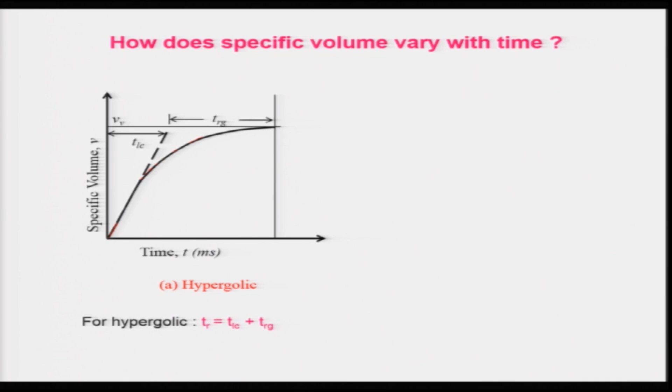And this total time, if you look at it, we can really look at as the residence time. It consists of two times. One is the liquid combustion time, which is required for the liquid phase reaction to occur, that is TLC, the liquid phase time, and the other one is the gas phase time, that is TRG, during which the gas phase reaction will be taking place. So, it is not that easy to demarcate that.

Generally what people do is draw a slope to this initial portion of the reactions, or the initial increase of specific volume, and when it joins this curve, they call this TLC, and the rest is basically the residence time for the gas phase reaction. So, the total residence time consists of two terms in case of hypergolic propellant. One is TLC and the other one is TRG, and you can conduct experiments and find that out.

So, let us look at what happens to the specific volume whenever the liquid fuel is injected into the combustion chamber, particularly for non-hypergolic propellant. In case of non-hypergolic propellant, when it is injected at A, the specific volume will remain almost constant till point B, and later on due to vaporization, atomization, and liquid fragmentation, disintegration of the bulk liquid, there will be vaporization. So, there is a little increase of the specific volume.

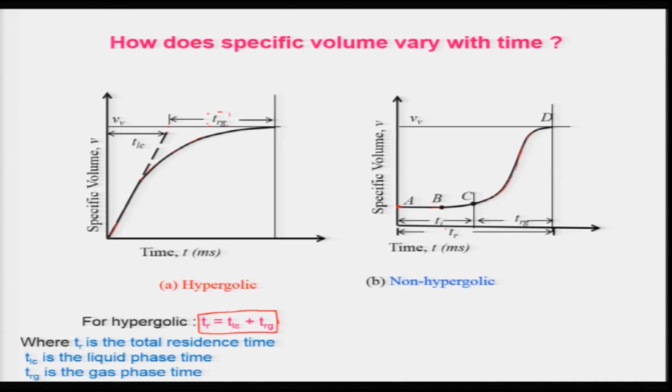So, in a similar manner we can define the total residence time TR as the sum of TI, the ignition delay time, and TRG, the residence time for the gas phase reaction. This total time must be provided such that complete combustion can take place for a particular length of the combustor.

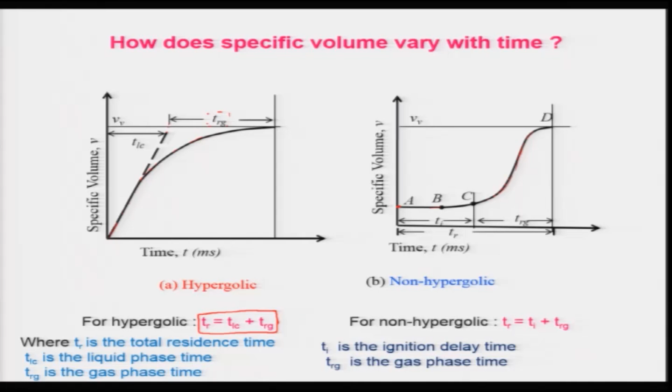And this is required for the design, and as I told, the process is so complex that you cannot really simulate it numerically with the best model available at this moment, even with the best computer. However, one can do a little modeling and look at it, but when you are designing, it is not really that easy. So, you will have to rely on these semi-phenomenological models that can help you.

So, let us look at how we can use this residence time for deciding the combustion chamber geometry. Combustion chamber geometry means, if we consider a cylindrical combustion chamber, a length and a diameter; in other words we will be looking at the volume of the combustion chamber. It is very important because a certain length must be provided in the combustion chamber for a particular velocity, such that the residence time will be good enough for completing the combustion.

So, in order to ensure complete combustion, we need to provide the minimum volume of the combustion chamber in a liquid propellant rocket engine, such that the liquid propellant has enough residence time inside the thrust chamber, so that we can have complete combustion and get a higher thrust utilizing all the energy embedded in the propellant. Therefore, this is very important. And let us look at a rocket engine.

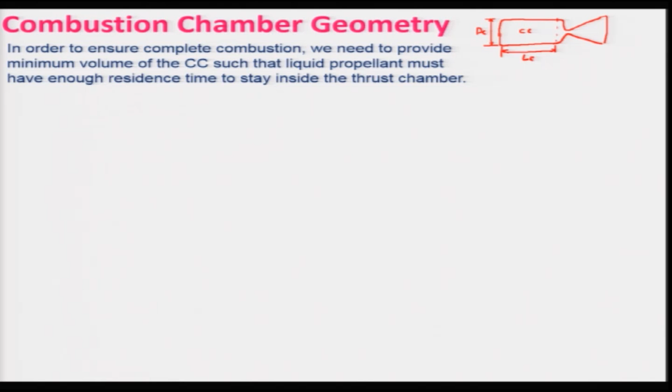If you look at a diagram of that, this portion is your combustion chamber, and it has a length Lc, and this is your diameter, I can say dc. So, from that I can get the area Ac. Ac is your cross-sectional area of the combustion chamber, and Lc is your length of the combustion chamber, and Vc is the volume of the combustion chamber.

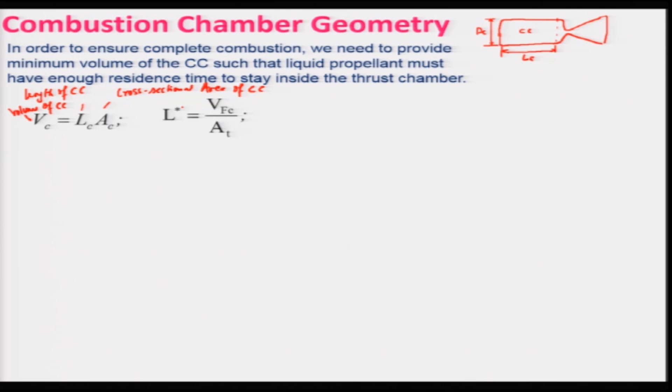So, we will be interested to have a minimum volume, such that it will be a compact one, and at the same time complete combustion must be ensured. So, for that we will have to look at what the residence time will be. Generally people use the characteristic length of a combustor or rocket engine, which is the ratio of Vfc divided by At. At is your throat area.

And Vfc is the sum of Vc, that means this volume, and from here till this, which I can call the convergent portion of the nozzle, V nozzle NC. Because in earlier days people were considering that combustion might be taking place till the end of that, that volume has to be considered in defining the characteristic length.

The characteristic length can also be related to the characteristic velocity. So, we can define a non-dimensional parameter, L star divided by C star. C star is your characteristic velocity. As we already have learned, C star represents how good the combustion is in a liquid propellant rocket engine. We had also defined the combustion efficiency using the characteristic velocity, which is a function of Ti, the ignition delay, for non-hypergolic propellant, and for hypergolic propellant, TLC, the time required for liquid phase combustion.

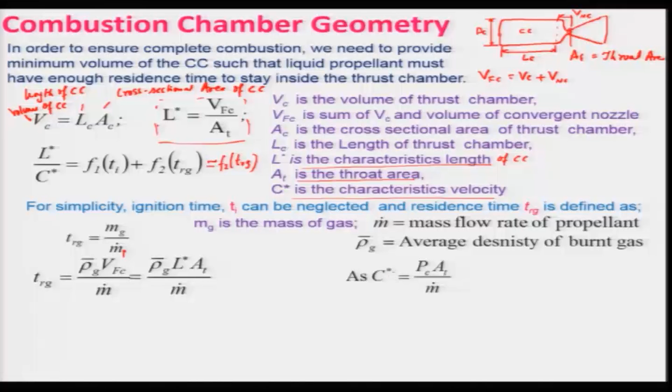If you relate m dot to C star, C star is nothing but Pc At over m dot. So, in place of m dot I can write Pc At over C star. At will cancel out, and I will get rho G L star C star over Pc. I would like to get an expression for L star over C star, so I will multiply C star in the denominator and numerator, so that it becomes squared, and then L star by C star becomes Pc divided by rho G C star squared into TRG.

And we know that the L star by C star is nothing but your function of TRG. If you look at this Pc rho g average C star square, you can find out that this is nothing but your gamma. Capital gamma is basically gamma to the half and 2 by gamma plus 1 to the power gamma plus 1 divided by 2 gamma minus 1.

So, generally the gamma for liquid propellant rocket engines is taken as 1.2. Of course, that depends on the type of propellant you are using, but generally it is taken as a value for the majority of the liquid propellants.

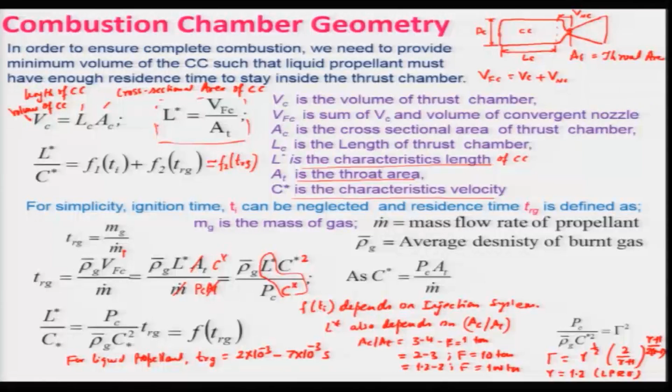So, generally these are the data used by American designers, that is AC by AT in the range of 1.2 to 4, but the German designers generally use slightly higher values because they want to make compact engines, so AC will be much higher and AT will be small, so that they can get a higher thrust. So, let us look at the characteristic length data.

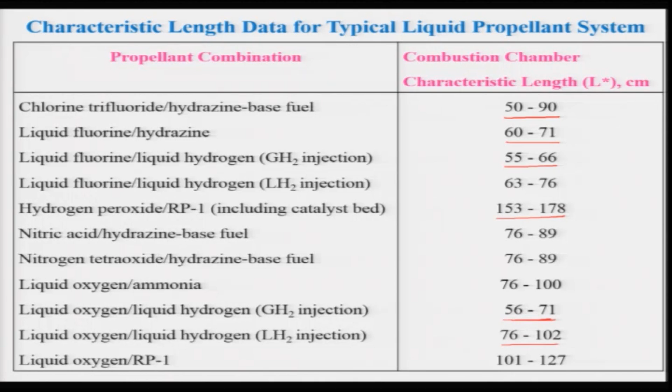So, this characteristic length data is used by designers, as one cannot really relate it to the other dependency factors, which are quite difficult to evaluate. And you must keep in mind that the characteristic length is used very much by designers, as I told. So, one has to be careful choosing the proper characteristic length, and with this we will stop. In the next lecture, we will be discussing other aspects of the liquid propellant system.